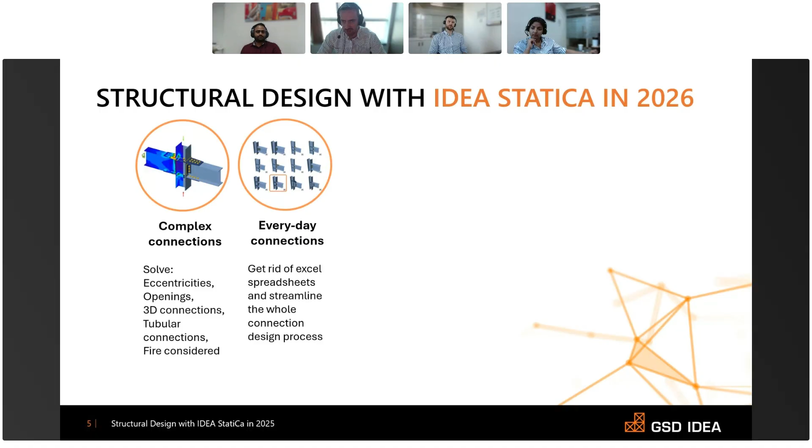Before we jump into the topic, just a quick reminder of how Idea Statica helps structural engineers, no matter whether you are a concrete steel contractor, EPC, precasting company, consultant. These use cases are the biggest pain of structural engineers for a long time, and these are the ones that Idea Statica supports and makes your life easy with. Complex connections, no need for further introduction. Everybody understands this is the flagship use case of Idea Statica. Everyday connections: compared to your most likely typical workflow with Excel spreadsheets, with simplified tools, you can save up to 80% of the time using Idea Statica on the standard connections.

Anchoring, another use case where engineers burn a lot of time. So whenever you need to check the base plate and consider the concrete block and reinforce it, this is where Idea Statica comes in and saves time. The 4th use case, concrete discontinuities, beams, walls with openings, pier caps, pile caps. These are a nightmare to design and code check properly, especially if you need to do not just the ULS checks, but also the SLS checks.

And the last use case is, coming back to steel, stability and buckling issues of a member, something that typically your global analysis tool will not provide. Okay, so that'd be the introduction. And now back to the topic of today. Dominic, please let us know why we're speaking.

All right, Jan, thank you. Let me just share my screen. All good? Can you see my screen? All right, awesome, thank you.

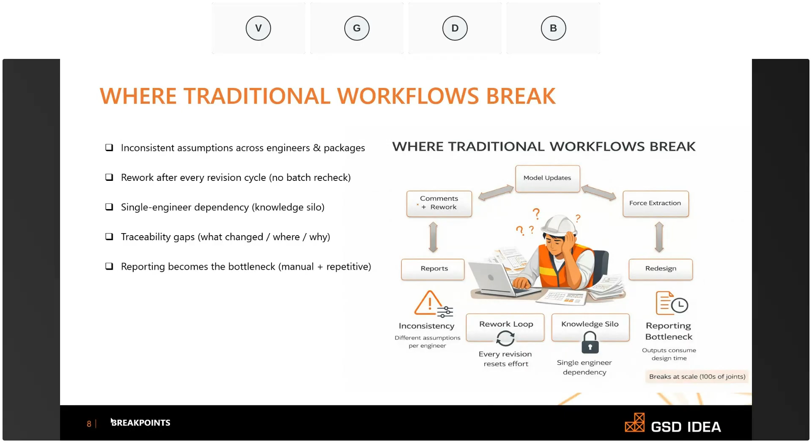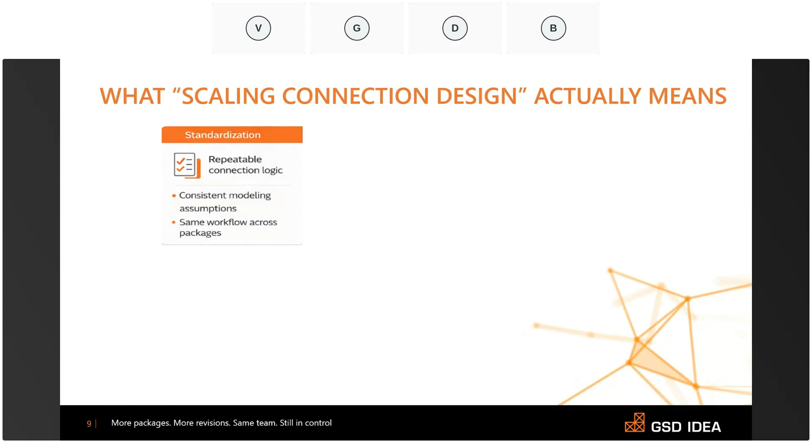Let's look at what scaling connection design actually means. When we want to scale the connection design effectively, we need to tackle the standardization: establish repeatable connection logic, consistent modeling assumptions, and uniform workflows across all packages. Similar connections should be designed in the same way, regardless of who works on them or where they appear.

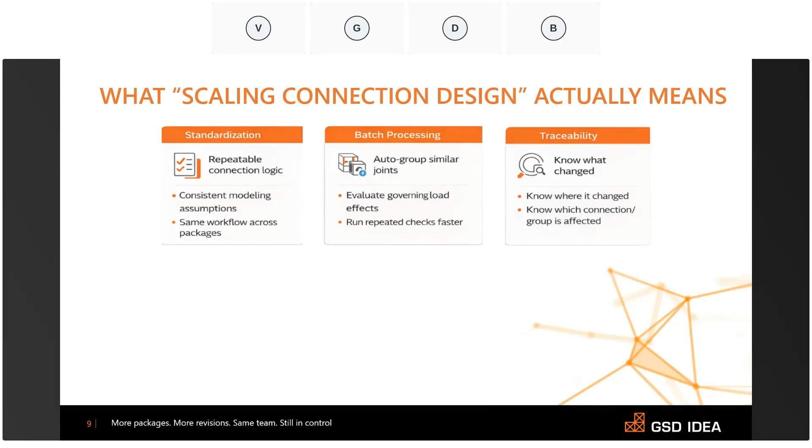Follow with the batch processing. Automatically group the joints, evaluate critical governing load effects, and run repeated checks in batches. Another point related to the problem is the traceability. Ensure the visibility into what changed, where it changed, and what is affected. Changes must be easy to identify, track, and audit throughout the whole design lifecycle.

Another point is the approval-ready outputs. Generating standardized approval-ready reports at scale should not be a problem. Since reporting is repeated for large groups of connections, this is a huge opportunity to automate and to reduce the manual efforts. Then the revision resilience. It enables seamless re-import of updated models, meaning we reuse the existing designs, continue from the current workflow state, and only recheck what has been changed rather than restarting the whole process again.

And last, engineering focus. We prioritize the unique or critical joints early in the process, and then avoid spending the time on low-risk repetitive connections, which are easier to tackle. We identify the critical joints early that require engineering judgment, and this increases the team throughput and significantly reduces the manual sorting and rework.

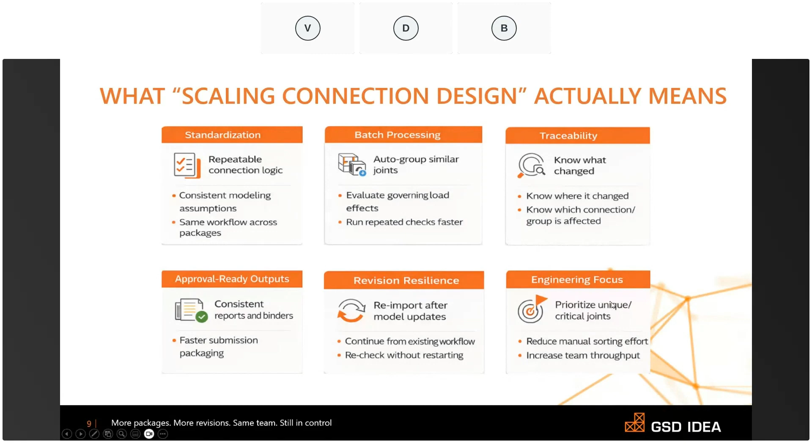Okay, now, before we get to that solution and we hear from Rose how to actually do that, I would like to know from our audience, where do you lose the most time in your current design check workflow? So I would like to launch the poll. And what are the options? We can vote for grouping and sorting similar joints across the model.

Or is it identifying the governing load combinations among many cases, or redesigning and checking after revisions, or preparing reports and submission binders for review that take a lot of time, or tracking and tracing the connections, IDs, and knowing which joint is where. Let us know in your voting. And if it's something completely different, please submit your comment to let us know what is your case. Okay, I'll give you a little more time to vote.

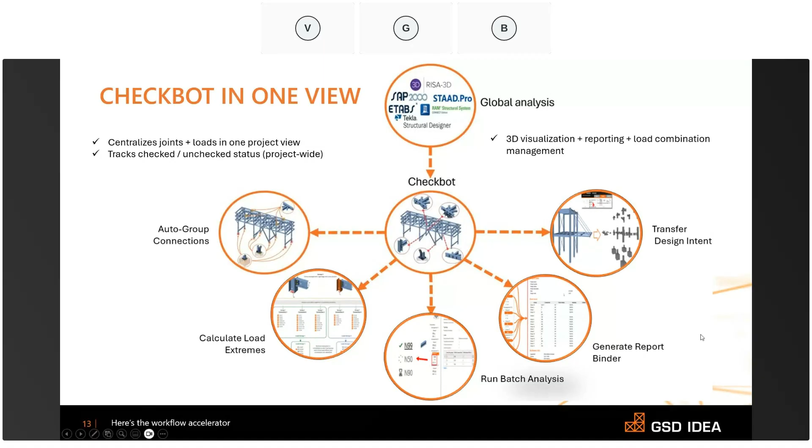And the best part of all of this, the reason why I called Checkbot the central hub in the first place, is that inside Checkbot you will get to know what is done, what is pending, and what has failed, all in one place. So there is no person who will have to keep tabs on the entire design workflow; instead, Checkbot does that for you. Now, let us elaborate the process and see a bit of Checkbot in detail,

starting from the global FEA. There are 45 plus CAD/FEA applications that can be linked with IDEA StatiCa at the moment. If you go to the IDEA StatiCa Support Center under BIM Workflow, supported integrations, you will find the list of CAD/FEA software that can be integrated with IDEA StatiCa, along with a demonstration of the integration process. So if your FEA software is within the list, just click on it and you can see the entire process by yourself.

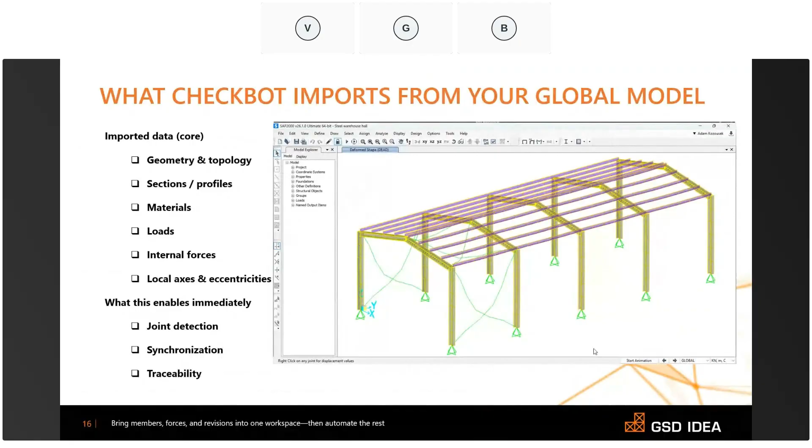Now, once the import from FEA to Checkbot is successful, let's see what exactly it imports and, most importantly, how that import helps the designer. It primarily imports the geometry and topology, which is the nodes and the members; the sections and profiles, which would be the steel cross sections; the materials, the grades, and the basic properties; load cases, combinations; internal forces: axial, shear, moment, and torsion; member directions; and also the rotations and offsets.

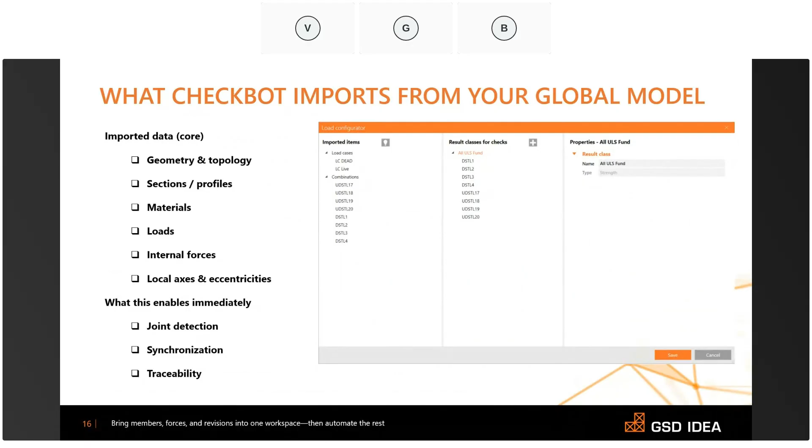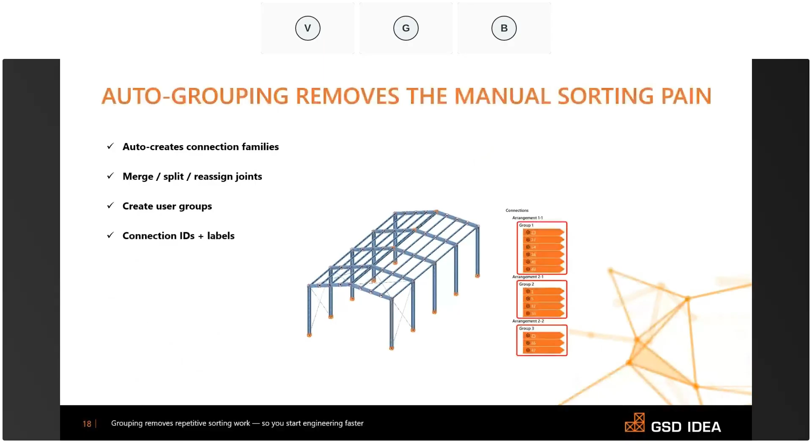And what does it do immediately? It auto identifies the connection locations in that model and groups them accordingly. So the primary task of Checkbot, as we've just discussed, is to auto group the connections across the whole model. We can generate these connection groups by four methods. The first is none, very self-explanatory: if you want connections to be grouped under no group, you can select none.

The second grouping is by typology. The third is advanced, with typology and cross section. And the fourth would be custom defined groups, commonly called user groups. Basically, it means that if you want to create a connection in a separate group and merge more connections to it, you can add those connections in a separate group.

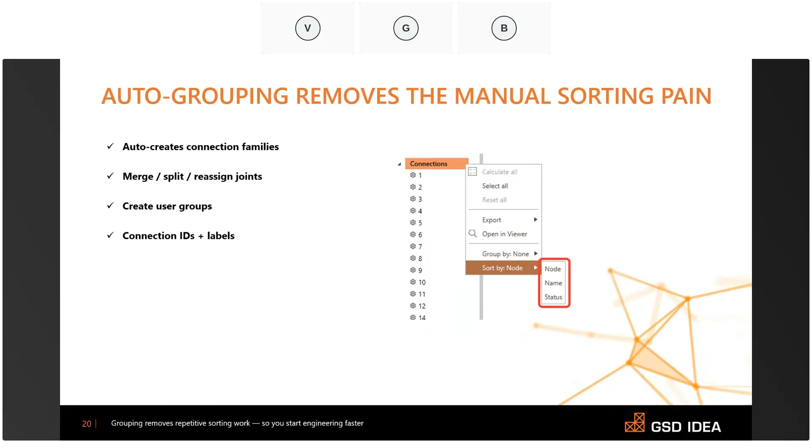And also you can sort the connections by name, node, and also the status of the analysis. Now let's see what exactly typology and arrangement mean. So I've told you about typology and the grouping part, but what exactly does typology mean? Typology means the number of members, that is member count, and also the relative orientation of the members, whether it's a beam to column member, if it's a beam to beam connection, etc.

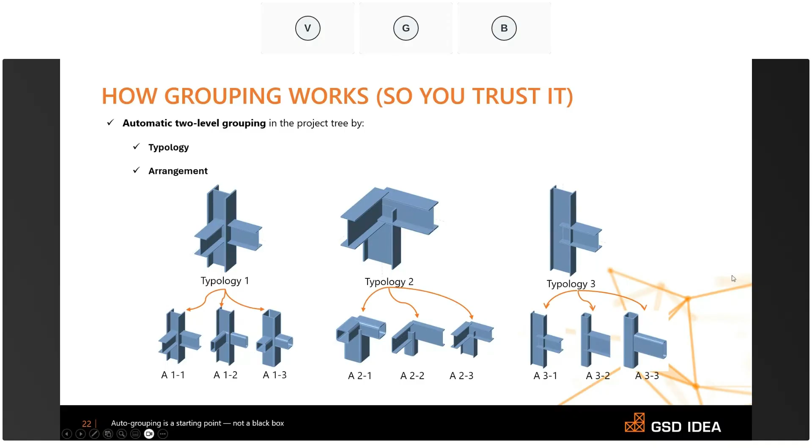And what is a subcategory of typology, which is the arrangement, that would be within a typology, which is grouped by cross sections and also the sizes of the cross section. So that's the base of the grouping in Idea Statica. Now the next task is the load combination. So let's just talk about the real load combinations.

All right. So in real projects, we don't have five load combinations. We have hundreds and we have thousands. So the problem is knowing which one actually governs that particular connection. And Checkbot automatically detects the governing maximum and minimum load effects for each of the connection groups. So it looks at all combinations and reduces them into the small set that actually controls that particular design.

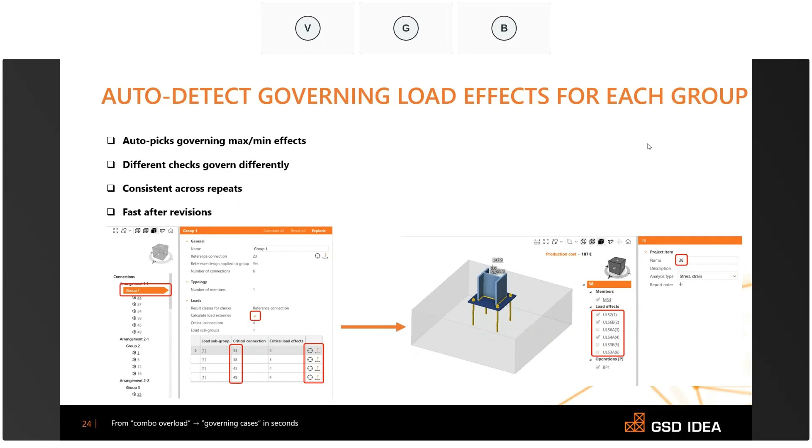Also, different checks are governed very differently. So axial force might govern one combination, shear and bending another. Interaction is a whole different story. So we would take a longer time to understand or create that loop, but Checkbot handles that logic automatically.

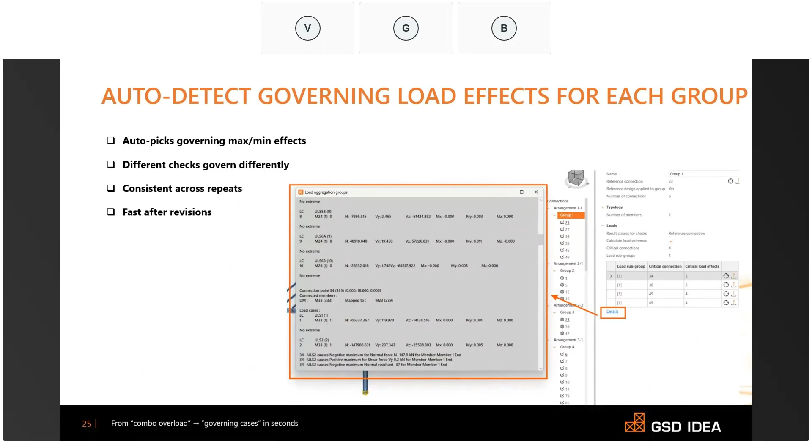Now the question is, what is the logic that runs behind the selection of governing load cases? As shown in the figure, it would be the maximum positive and maximum negative value of each of the internal forces, the axial, shear in Y, shear in Z, moment about X, Y, and Z, which altogether would give us 12 critical load cases. And then it checks for the combined resultants, which is maximum shear, maximum bending, and combined normal effects.

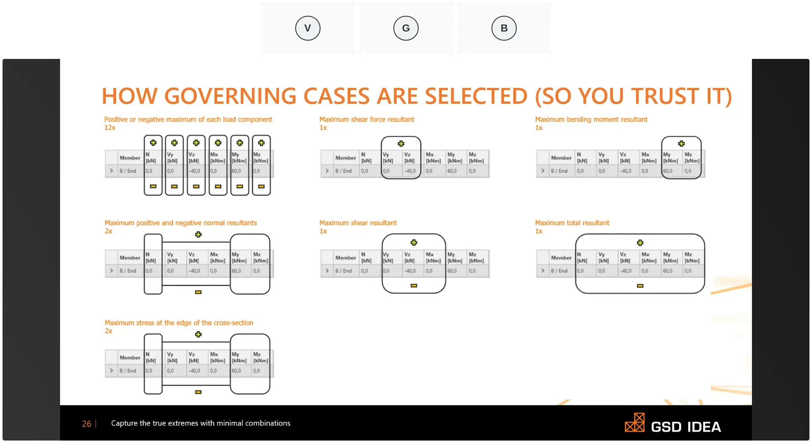It also evaluates cases where shear and torsion act together, because torsion can significantly change the shear behavior. And finally, it looks at the worst edge stress in the cross section as well, because in certain cases that's often what's governing. Now, this is the logic behind the selection of the load case. Now that we have seen the logic, let's discuss the calculate load extremes option in Idea Statica.

Now, many of you might have noticed this option, which is the calculation of load extremes. So what happens when we enable that in a connection group? Checkbot scans all load combinations for all connections in that group, and it automatically keeps only the extreme, the governing load effects, and unselects the rest.

So instead of checking hundreds of combinations per connection repeatedly, we reduce it to only one or a few of the critical ones. So that's why in most cases you might see a different number of critical load effects per connection. Sometimes it could be 2, it could be 1, it could be 3, etc. So in those cases, if you would want to change the typology or the operations based on the envelope, then you can change that as well.

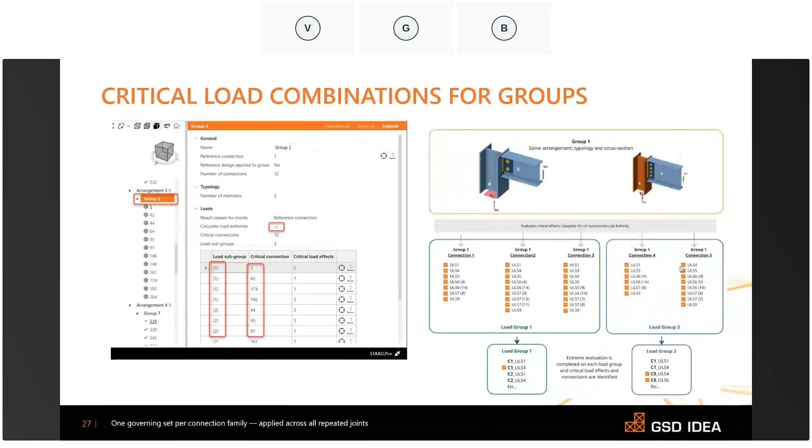Now, after loads, it would be the batch design or the batch analysis. A few terms that you would want to know before we proceed with the demo, which would be the reference connection. Now, what is a reference connection? It is the master connection for which we would be modeling the connection components in the IDEA StatiCa application. There are child connections. They are within the same family, but they are automatically linked to the reference connection.

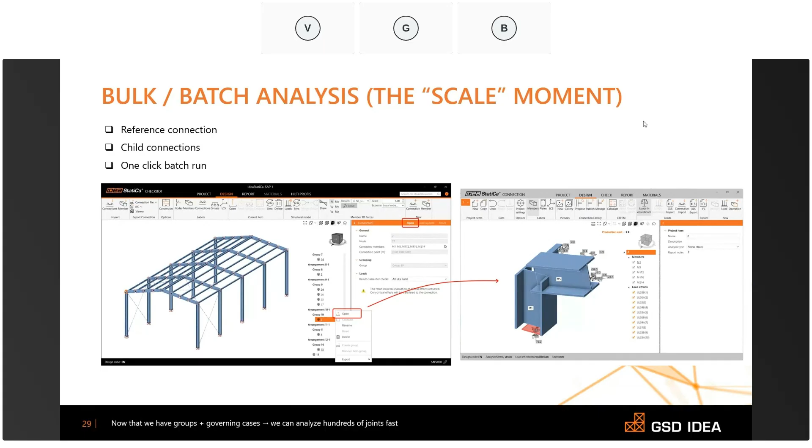Now, there is a one click batch run, which is the calculate all or calculate group tab, which means that Checkbot runs every child in that group, including the reference connection, in just one go. And also, we would be able to see the progress of the design, if it has passed or failed the code check, by seeing the color coding within Checkbot, and also by watching the symbols next to the respective connections, which would be a green check, a red cross, a cogwheel with a proceed mark, which Venki would be explaining in the demo session.

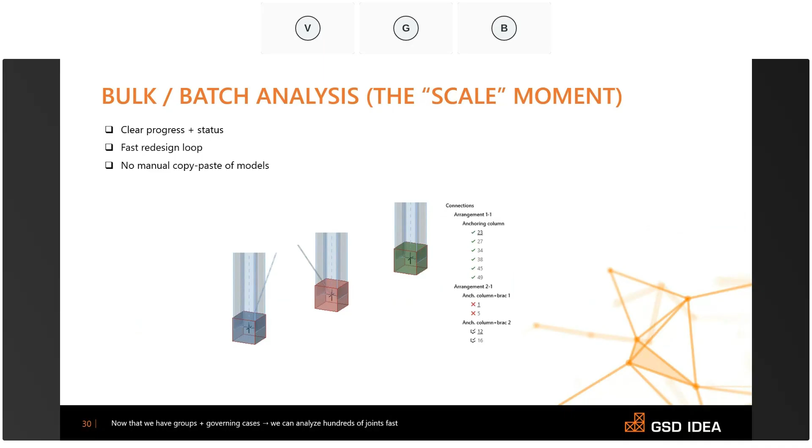And okay, now the question that you would have in your mind is, what gets copied from the reference to the child, and what stays unique in each individual connection? Obviously, the copy from the reference connection would be operations, the parameters, if you have defined any, the design codes, and also the settings, and the report templates.

But what stays unique per connection would be the internal forces or the load effects per connection, the member sizes, orientation, and also the member local axes, and the utilization for individual connections. That stays completely unique, irrespective of which are the reference and which the child connections.

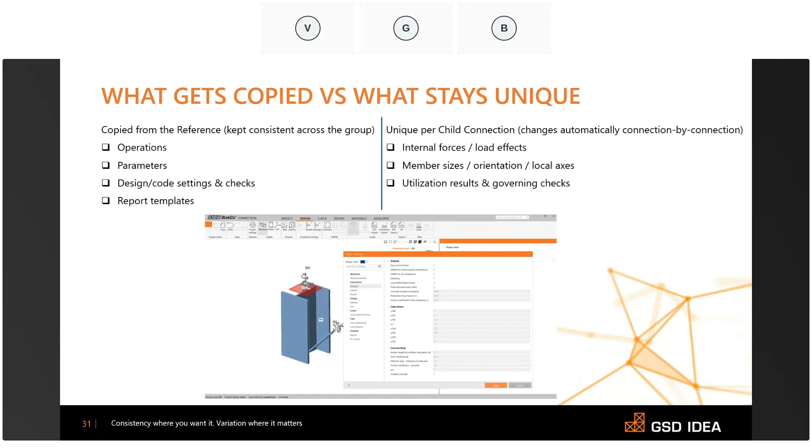Now, about the reports, the generation of reports in IDEA StatiCa — you can generate a bulk report or generate the complete binder after the first iteration, after revisions, or after consultant comments.

All you have to do if there is a revision is go back to the design, make the changes you want, run the bulk analysis again, and then come back to the report. Just click on the generate option, and it will automatically regenerate without changing the customization you kept for the project initially.

And the best part is that it can be exported not just as a complete binder — if you want to export it for individual connections, you can do that as well.

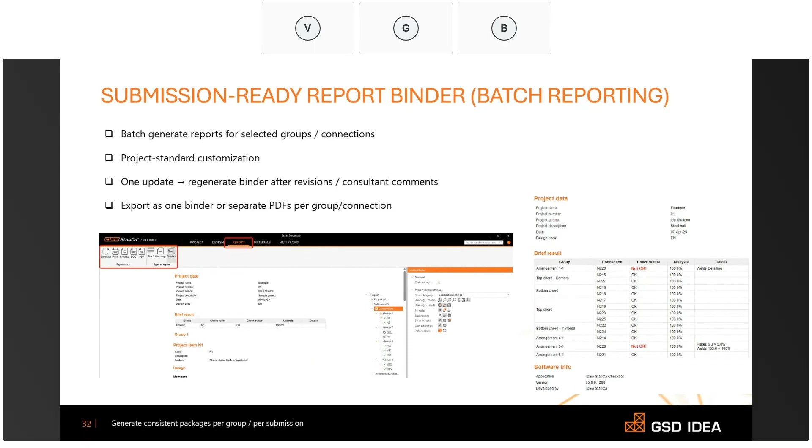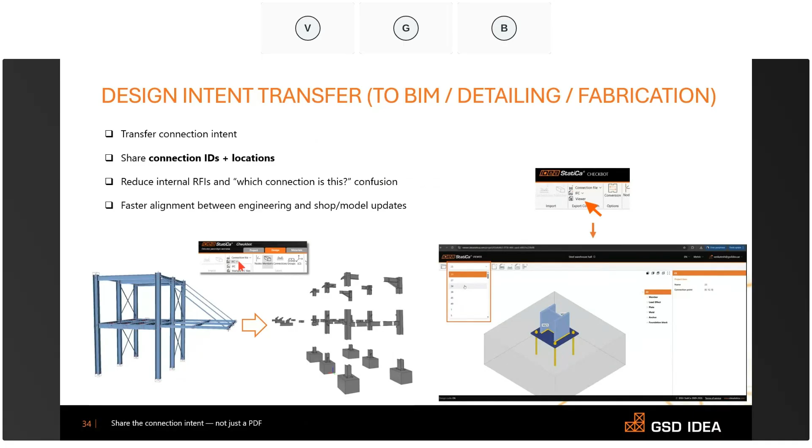As I mentioned in the beginning, not just the PDFs but also the design transfer, the entire intent transfer, can be done as a whole without losing anything, through two methods — IFC, and also the IDEA StatiCa Viewer.

And with that, I am passing the presenter on to Venki. So Venki, just walk us through the demonstration of the Checkbot.

Yes, thank you, Rose, for walking us through the technical aspects of the batch workflow which users get benefited from. Let me quickly share my screen to walk you through the practical application side. I hope everyone can see my screen. Okay, great, thanks for confirmation.

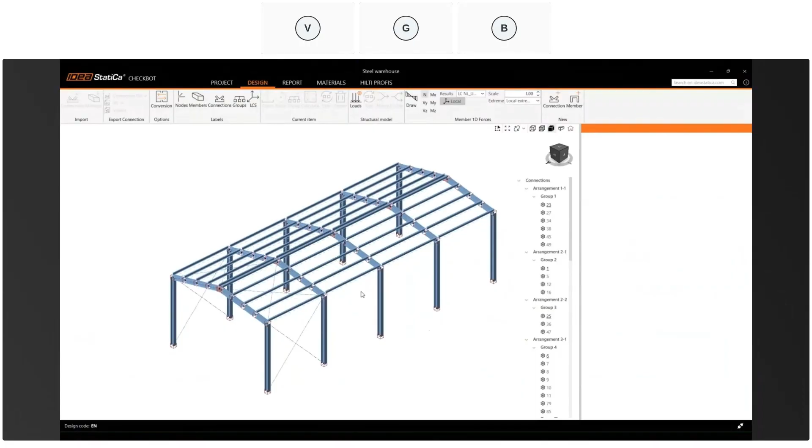So let's walk through the demonstration. In the Checkbot, once you have the model integrated and imported, this is how it looks — the entire structure, which has all the information about section sizes, material grades, and so on.

To quickly see that, you can go to the material tab, and here you can see all the cross sections and material grades which were imported from the global analysis model.

All the load cases and load combinations from the global analysis model will be imported as well, found in the loads tab. On the left side you can see all the load cases and load combinations, and on the right side the result class for which your respective connections are being analyzed.

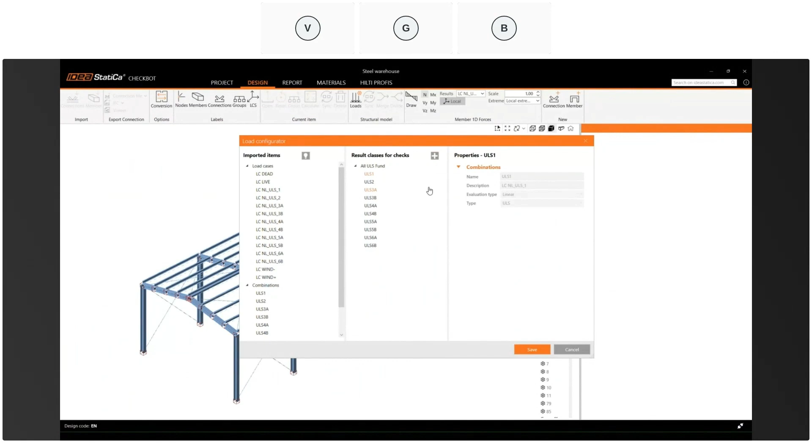It's very easy to customize this — you can just right click and delete it, or drag and drop the load cases for consideration, or create your own result class if you want to analyze certain sets of connections with a particular result class.

You also have the conversion tab, where some material names in your global model might not exactly match IDEA StatiCa database names. That list will be here.

You can just click on this plus to assign the IDEA StatiCa native database profiles to these unmapped section sizes if they were not mapped properly.

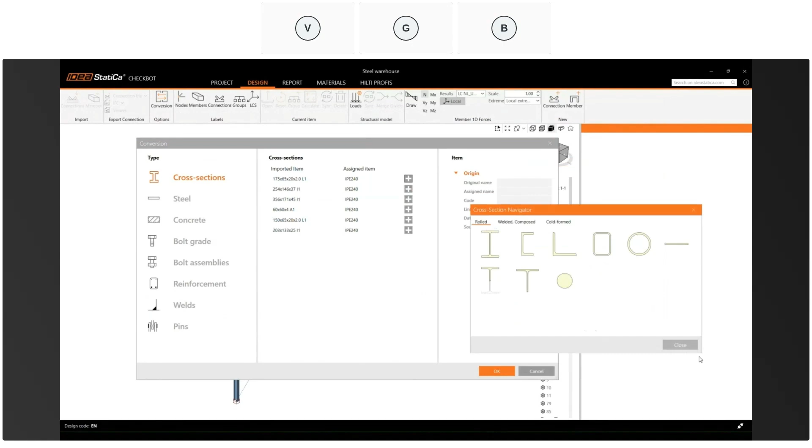This can be done at any point in the process, so if something is done accidentally, you don't have to worry about it.

This is what we call the dynamic transforming cube. As of now it's transparent, but it's called dynamic because it changes colors based on the status of the connection, which Rose explained. This cube is unique to each location, which has a unique name.

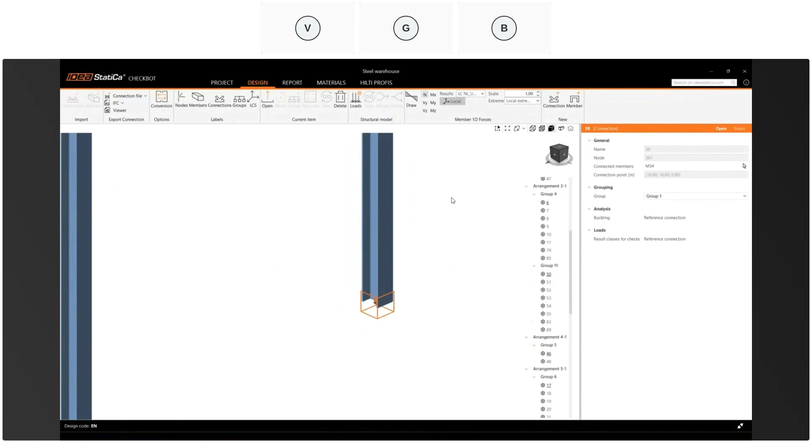This connection name is 38, which can be seen on the right side. Also, we can see the rafter is split — this is very common in the global analysis model, but we do not want this for the connection design.

So what do we do? There is an option in Checkbot to merge the member — just click on the member, and in the top structural model options there is a merge option. Click on it, and it will give you a list of members which can be merged. Switch it on and click merge.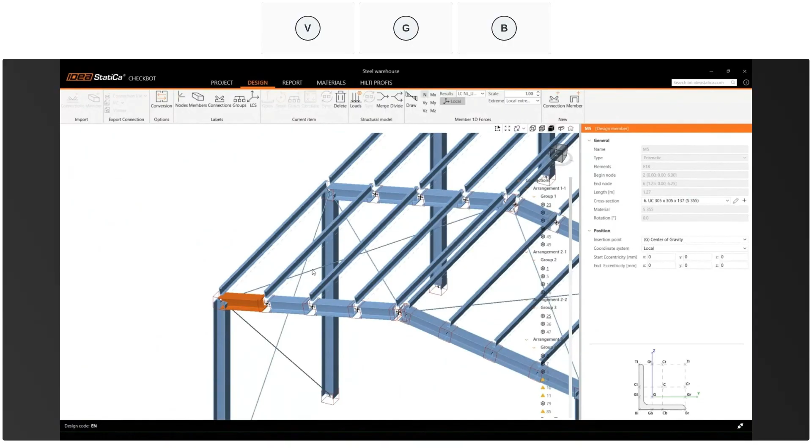Press OK, and similarly you can repeat the process for the left side rafter — just click on one member and merge. It will give you a list of members that can be merged in the same plane, so merge it.

One shortcut here: if you click merge and have automatic ticked at the bottom, click on the top to auto-select everything and click merge. Similarly, if you have the selected member at the top, select the bottom member to auto-select all the rest of the members in the selection — that's a shortcut if you have more members.

And similarly, you can repeat the process for the rest of the rafters — third rafter merge, fourth rafter, and the last rafter.

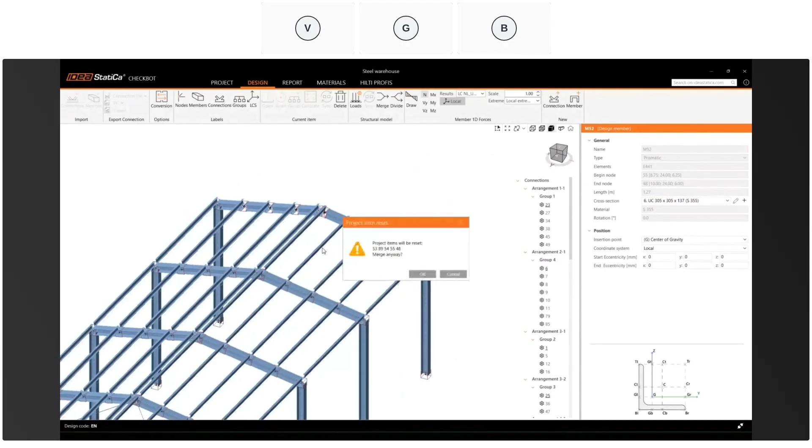So the merging process is done. You can see group one, which corresponds to a single group of similar connections, and the highlighted locations on the canvas are shown as yellow color cubes.

At any point, if you don't like the name assigned by Checkbot, you can change it to your preference. Here, I'll change it to base plate connection. And it will be changed - the group name changes from default to base plate.

This group has one connection with an underline, and the rest without underline, which means the underlined connection is the master or reference connection, and the rest are child or dependent connections. So we will work with only the master connection. Let's see how it goes.

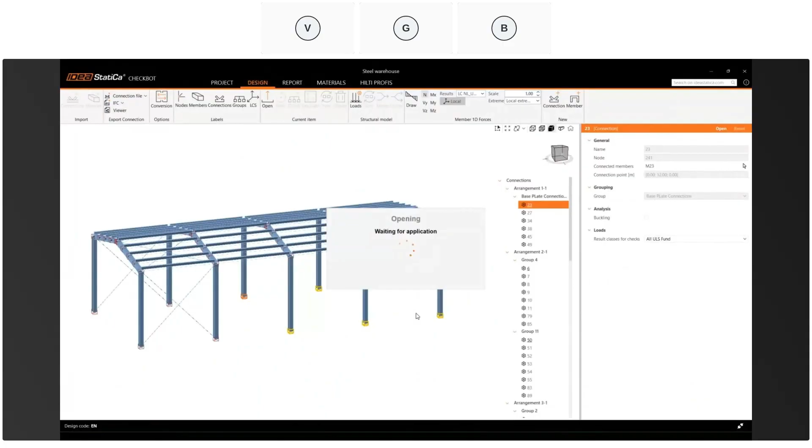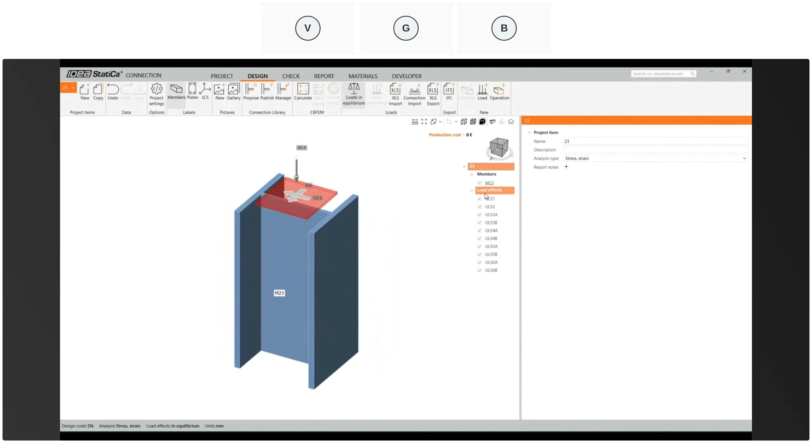So we are opening the 23rd connection, and the analysis will be performed in the connection module itself, since Checkbot doesn't have a native analysis engine. Here, the member topology is shown, and all load cases were automatically imported from the global analysis model. All we have to do is assign the design operations, like the base plate in this case.

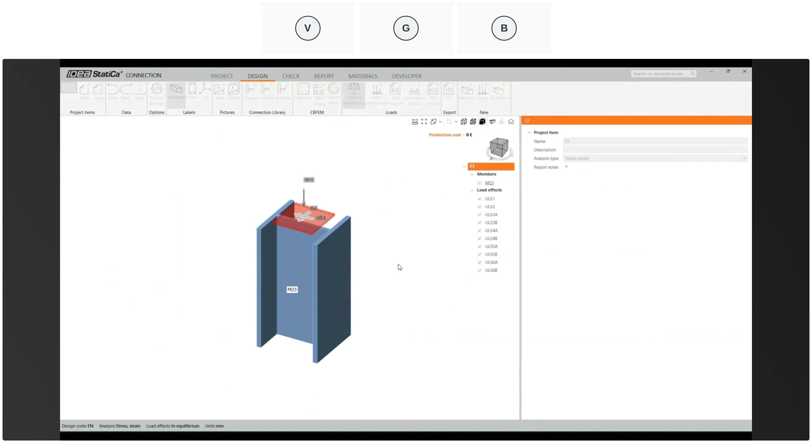For that, we can go to operations and click on the base plate operation. But since we're highlighting the workflow, let's take a shortcut possible in IDEA StatiCa - go to the propose option. Once you click propose, similar topology templates that can be applied will pop up. Just select as per your requirement and press OK to automatically assign the template to the topology.

I have my connection already done, so if I want any changes, I can quickly change by referring to the properties. I'll quickly save it and close it.

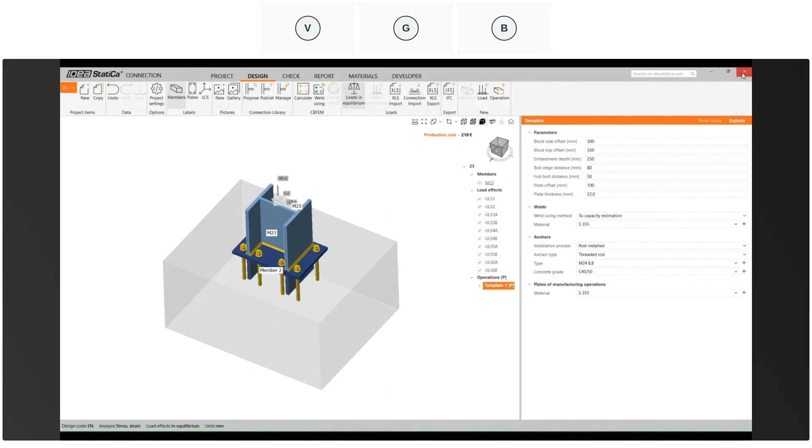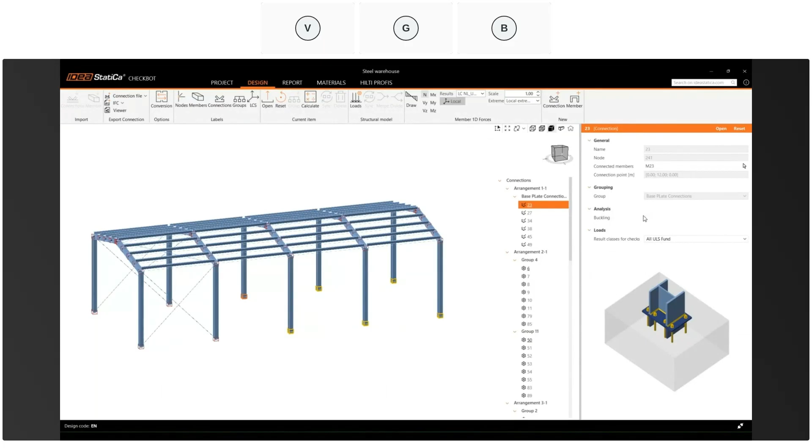So we've finished the master connection or reference connection. If you want buckling analysis as well, click the master connection, and there's an option on the right side to switch on buckling. You only need to set it on the master connection, and that setting will be automatically copied to the rest of the connections.

If you click the group, you'll see an option called calculate load extremes, which Rose explained earlier in her presentation. Once switched on, load extremes are calculated for similar connections in the group. Here the group has 6 connections, but only 4 are critical - meaning 2 similar connections don't have critical load combinations and don't need analysis. Let's switch on calculate load extremes and see how it works.

So the 23 connection is not critical as per critical load effects. Let's open the connection in the connection module to see it.

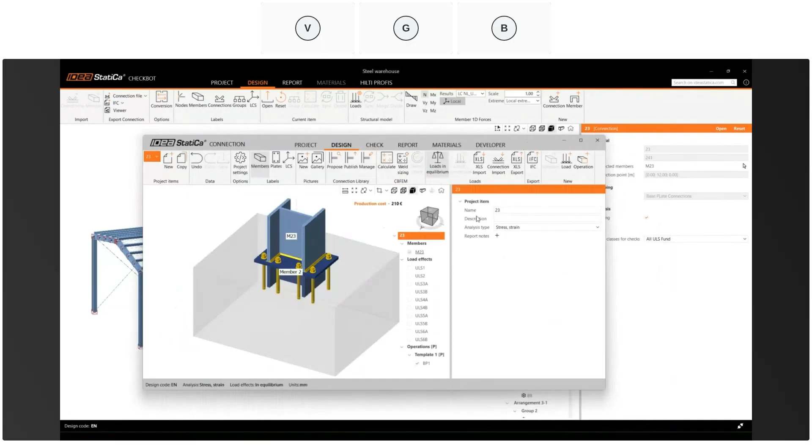Here it is - all the load effects on the right side are switched off, meaning no load combination is critical. You can see a dash next to 23, meaning it's not critical and needs no analysis, as decided by critical load effects. Let's open another connection, the 34 connection, and see what happens there.

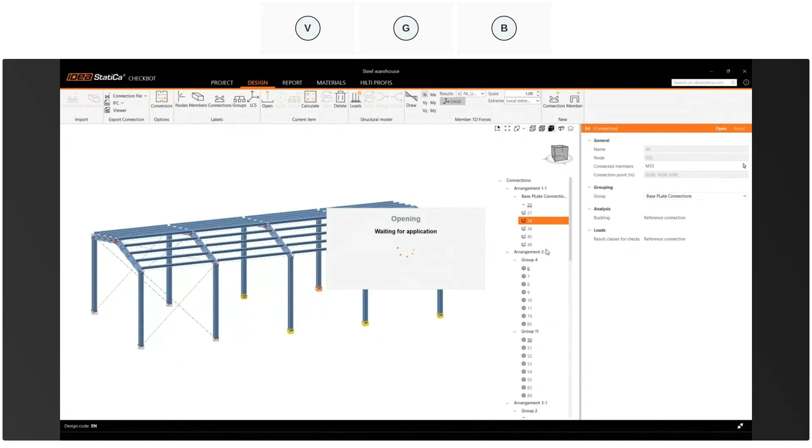Here you can see the load effects - all are switched off except certain cases which are switched on in disabled mode, meaning only the critical load effects are chosen. This is done automatically by Checkbot itself. This is what critical load effects does - if you have a huge number of load combinations, it reduces them to a manageable, minimal set for faster analysis, saving a lot of time.

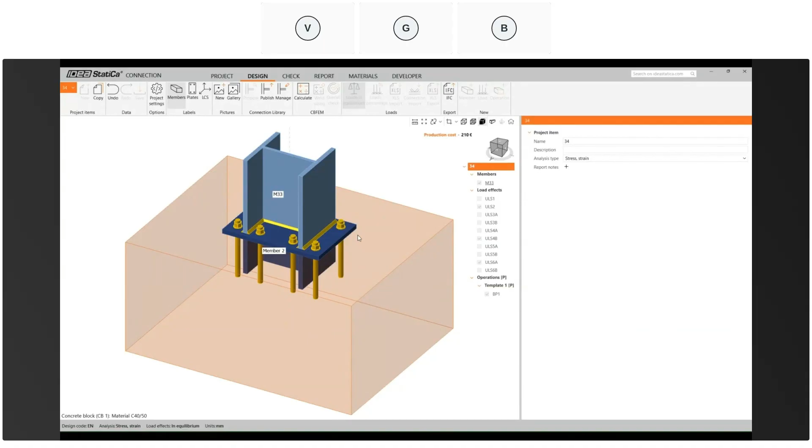On the left side, we can see the design operations are automatically copied or propagated from the master connection into this child connection. Let's close it and right-click on the connection to calculate all - with one click we can calculate all similar connections in that group.

We can see dashes next to 23 and 27, meaning those 2 connections are not critical. On the right side, calculate load extremes shows only 4 connections are critical, so only those 4 critical connections are being analyzed.

Once you click the analyzed connection, you can see the summary of results - plates, anchors, welds, including buckling. So while the analysis is performed, you can check the results without opening the connection module again.

And similarly for the next group, we will open the master connection and just click on 6 and open the master connection. So here we can see it says saving connection. In CheckBot, there is no automatic save button, but the saving is done automatically, so you don't have to do anything. This process is automatic.

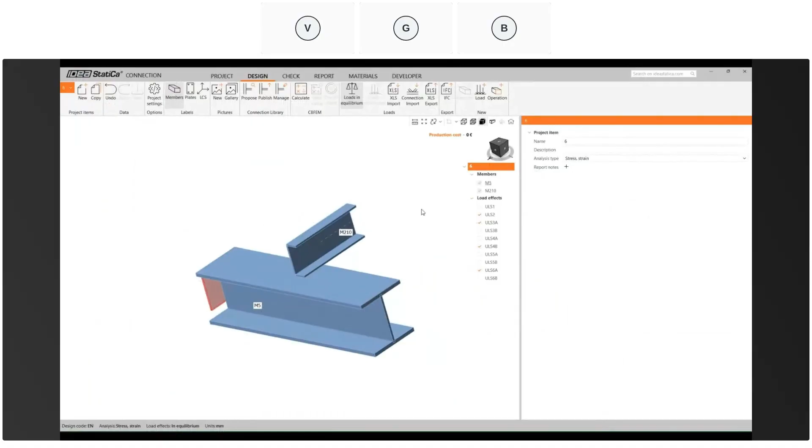Now, after saving, the 6th connection is getting opened. Similarly, what we did in the first group, we will repeat the same process again. We'll assign design operations, switch on calculate load extremes and buckling, and calculate all. And we'll repeat this process for a few other groups.

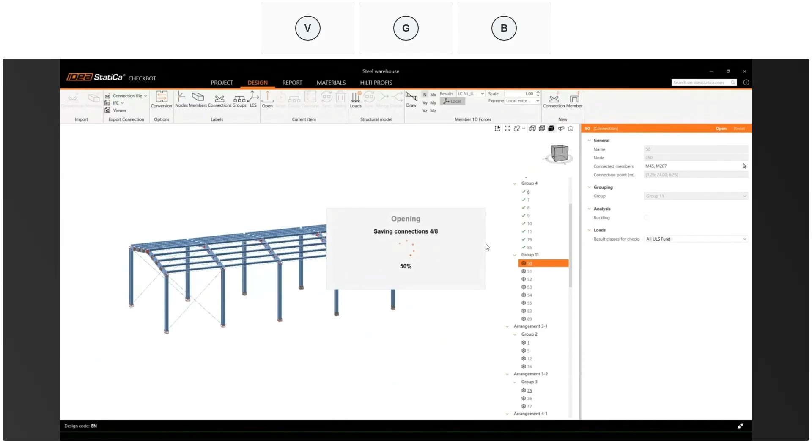Like group 11, we'll open the master connection. It saves the CheckBot file, and it opens the 50 connection in the connection module, and we will bulk calculate.

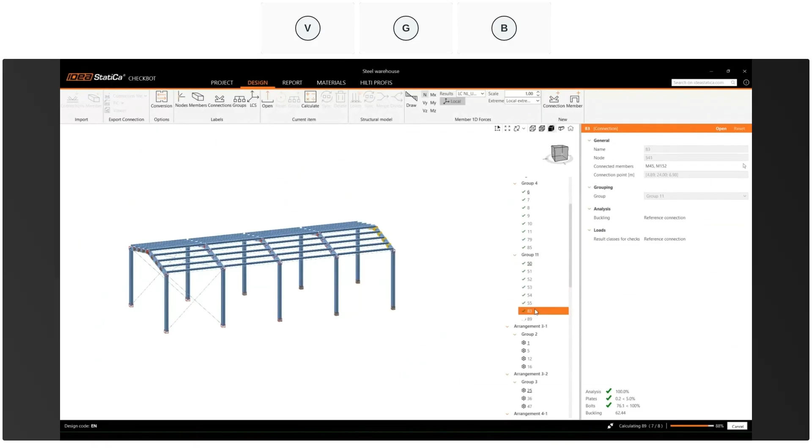So what we are doing is we are analyzing each and every joint in the structure for their respective load combinations, which will end up having an economical design rather than being over conservative with thicker plates or more bolts, and so on.

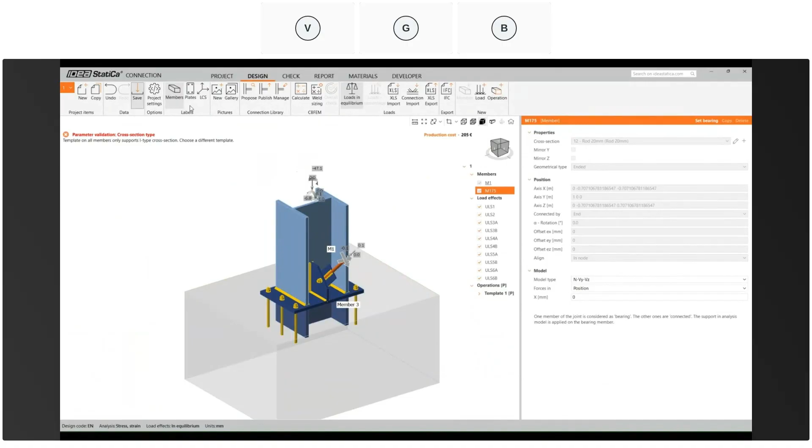So we do have a lot of shortcuts to use in IDEA StatiCa. If you're not using them, feel free to explore them.

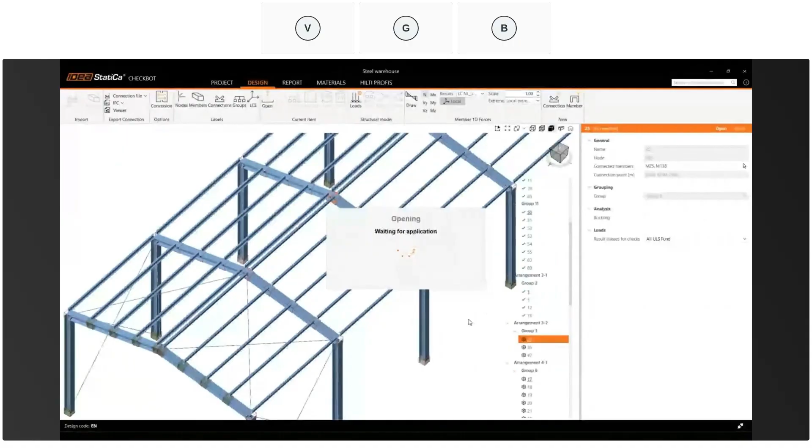So group 2 is done. Then we'll go with group 3. We'll open the master connection, which is connection 23, and we'll assign some template, save it, close it, and analyze it.

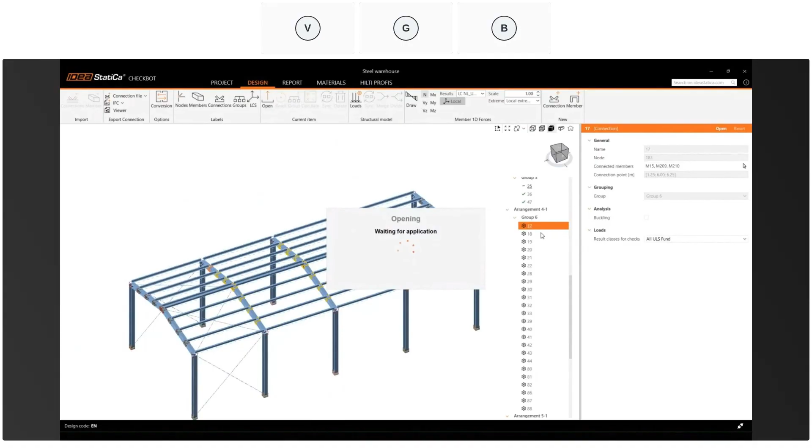And group 6 is the last group we will be analyzing for this demonstration. Here also we will open the master connection and assign a template, and we'll bulk analyze. As you can see, there are 16 critical connections in this group 6.

This is a common structure in any moderate to big scale structures. Like Jan mentioned at the start, data centers will have a lot of repeatable connections, and these warehouses or decking slabs or mezzanine floors, and so on, will have a huge number of repeatable connections. So we will design one and bulk analyze the rest of the similar connections in this fashion.

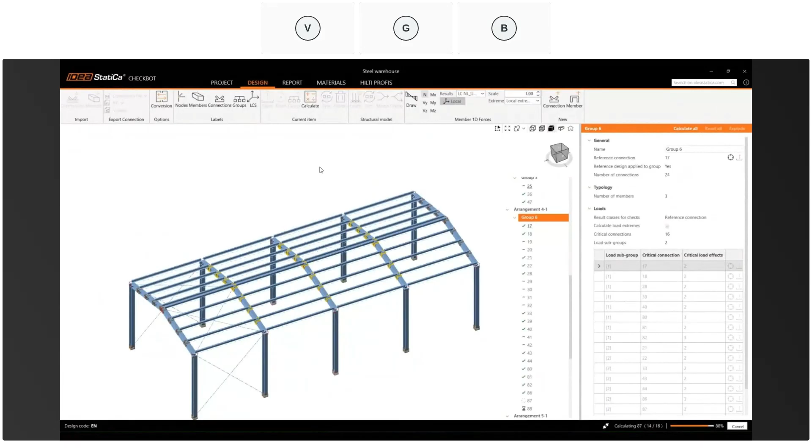So this 6th group is almost done. So it is done—you can see the dynamic cube transformed into green, which says code check passed.

So after we have successfully analyzed, the next step is for us to prepare the report. Let's go to the report tab. The report tab here is not an individual report—it's a submission ready binder, what you'll get out of it. IDEA StatiCa reports are flexible, as you know, so you can select any options you want to see, like the project info, software information, and the connection settings, and you can switch on or off any report you want to see in the binder. Certain reports as well you can switch on or off.

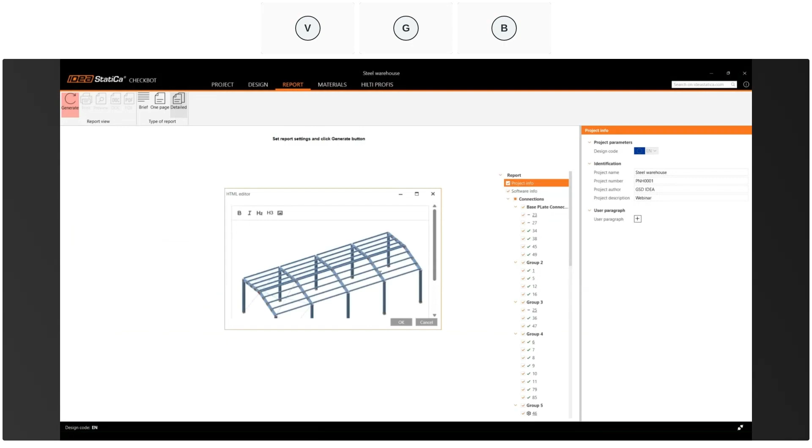There is also a user paragraph for the project, in which you can add certain text or any visuals. So here I'm adding a visual for the entire structure. As you can see, this image I can see in the final report, as well as individual groups. You have this option to add any custom defined paragraphs or images—you can just type anything, or add an image. The purpose of adding an image to a group might be to represent the marking plan for that respective connection.

And similarly, we'll repeat the same process for the rest of the groups, like group 2, group 3, marking plan for the next group, and for group 6, and finally group 11.

So once it is done, we will click on generate. In the report, we have 3 sets of options: the first is brief, the second is a 1 page, and the last is a detailed option. What we are generating is the detailed option, which has the summary and the individual reports extracted from IDEA StatiCa attached.

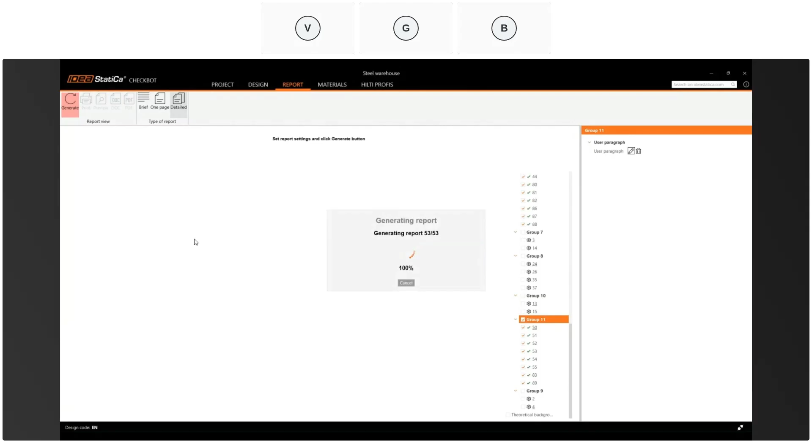So here is the report. First is the project information—you can customize it as per your requirement. Next is the structure representation for which this particular package is being submitted.

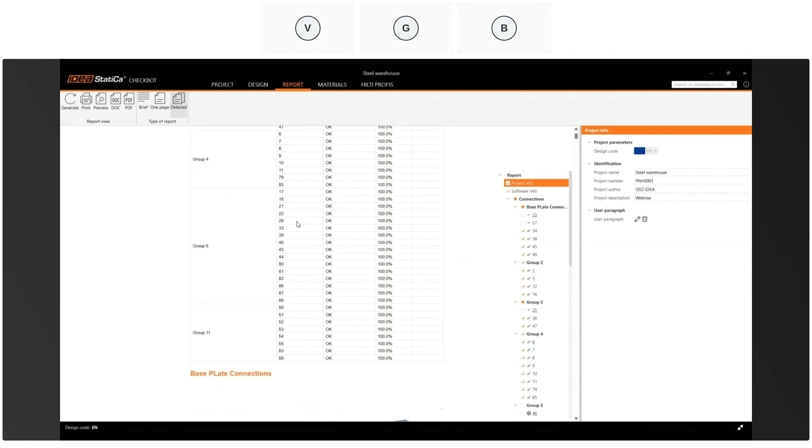Followed by the software information, followed by the summary of all the connections we selected, of all the groups, followed by connection IDs, status, and percentage. If you select the brief option, you will have it up to the summary. But since we selected detail, we have a continuation with the base plate group, which has the marking plan, followed by the individual reports, like project item 34.

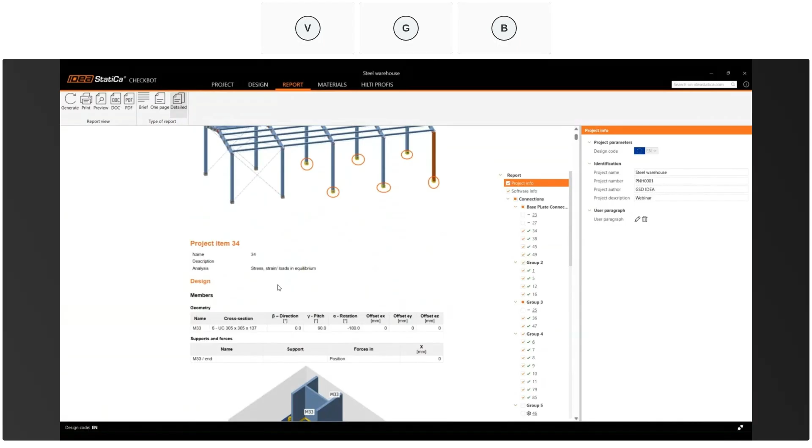This is similar to what we extract as an individual report. It has all the information about the inputs and the stress checks, strain checks, and even buckling analysis results, followed by the second connection, and so on. And on the right side, you can use these connections as bookmarks as well. Just click on it to go to that location.

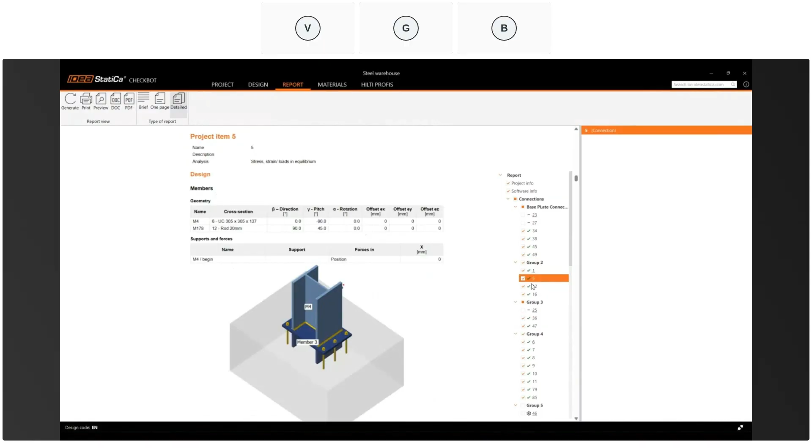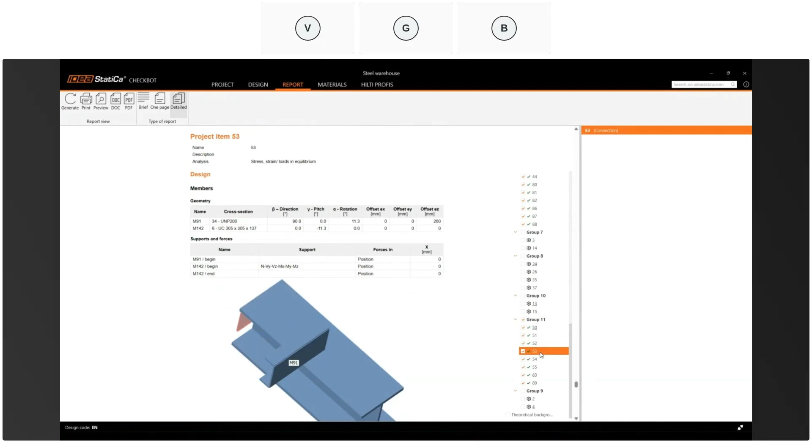And finally, you can export the combined binder, and this report can be exported in two formats. One is a document and the other one is a PDF file. So you don't have to do anything. You just print it and submit it.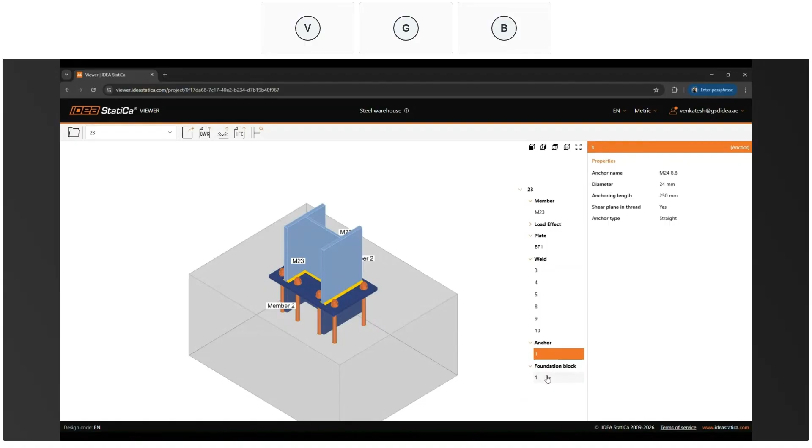So here you can see the viewer link, which has the information about section sizes, load effects, the plate bill of material information, very detailed information, and the weld sizes, the type of welds, anchor diameters, and even the concrete block information. And this viewer link has not only a single file, but all the files we selected in Checkbot. And you can select any connection to see it, and see the detail level of information available in the viewer.

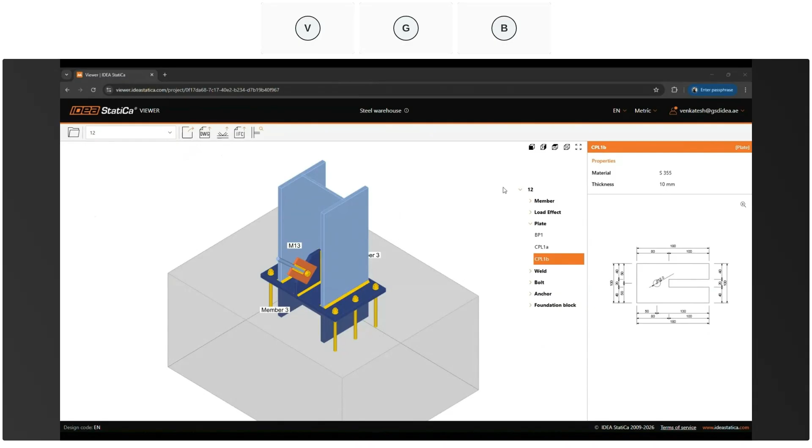And this viewer link can be downloaded as a 3D DWG file. You can export as an IDEA StatiCa file or even as an IFC file. Easy to share. And the second method is we select the connections we want to export, go to the export connections, and click on IFC. There are two options, multiple IFC files or combined IFC. So we'll go with combined IFC for this and save it with some name. Here we'll go with warehouse IFC.

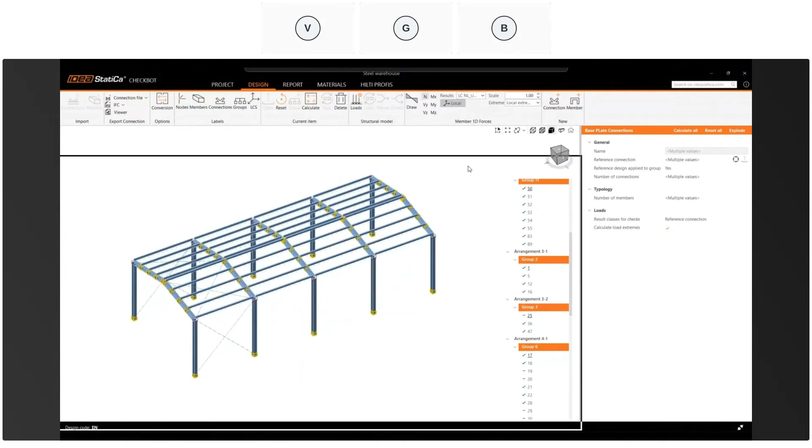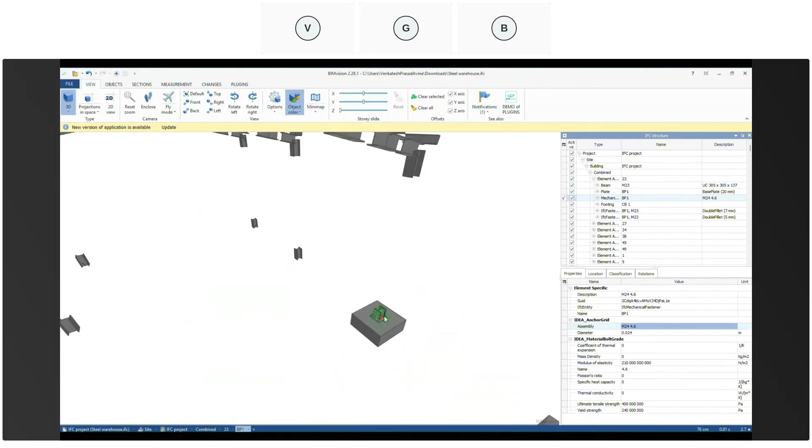And one IFC file will be opened. So here it is. As you know, IFC files are the most compatible format across BIM models, FEM models, or CAD models. This IFC model has a lot of data as well. Once you click on it, you can see the information about each object, about the anchors, M24, and so on. And most of all, the major benefit of using IFC files is that it retains the coordinates, so you can superimpose it with any third-party applications to check for clashes with other departments.

So that is the end of the demonstration. Let me continue with some tips you can use while working with Checkbot. The first one is the force check. When you import your global analysis model into Checkbot, you might be curious to check whether the forces are transferring exactly as per the global analysis model or not.

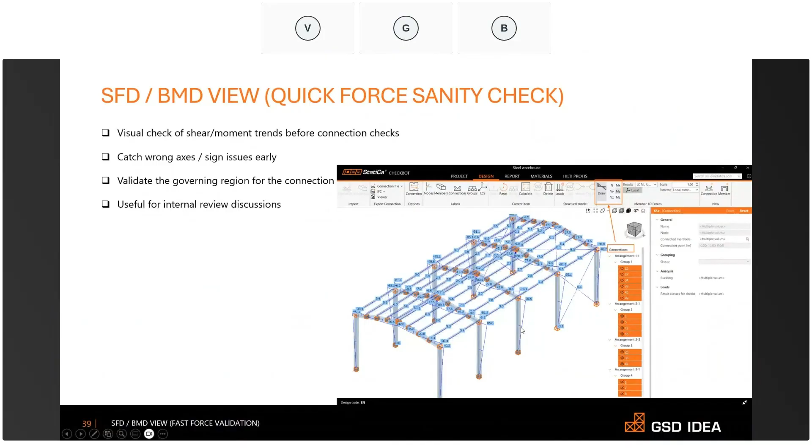Then you can open the model in Checkbot, go to the draw option, and select any degree of freedom, translational or rotational, to see that respective view while selecting the connection IDs in the tree of items. In this case, I selected the connections and the major axis bending moment diagram, and I can see the view accordingly. This serves to quickly verify whether the forces are being transferred properly or not. So use this option to cross-check the forces.

And the second one, the area selection tool. Sometimes the global analysis model will not properly match in Checkbot. We might have to assign some eccentricities as per the connection intent. Checkbot has unique options for that. You can click on the member to assign the eccentricities of this member at the start node and end node, and this member will be offset accordingly based on the eccentricities provided.

And if it is a big structure, there might be a lot of members. In such a case, there is another option called the area tool. You can select the area tool, select all the members in the area by dragging a box, and assign the eccentricities for all the selected members in one go.

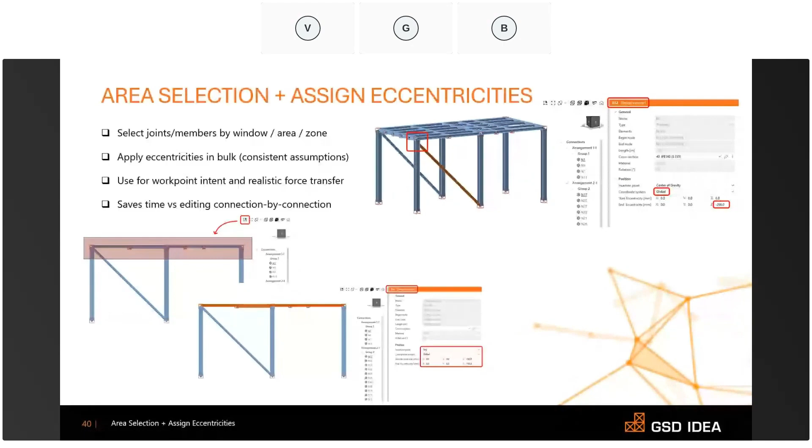And also all the selected members can be adjusted with respect to the insertion point, like top of steel or bottom of steel or CG to CG, and so on. To have more context on this insertion point, you can see them here. If you put top, all objects will be aligned with the top, and if you put bottom, all objects will be aligned with the bottom. And you can select any of these options in the insertion point.

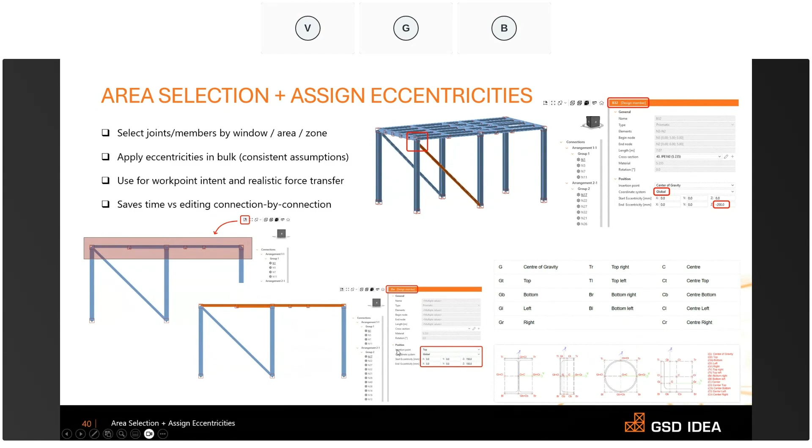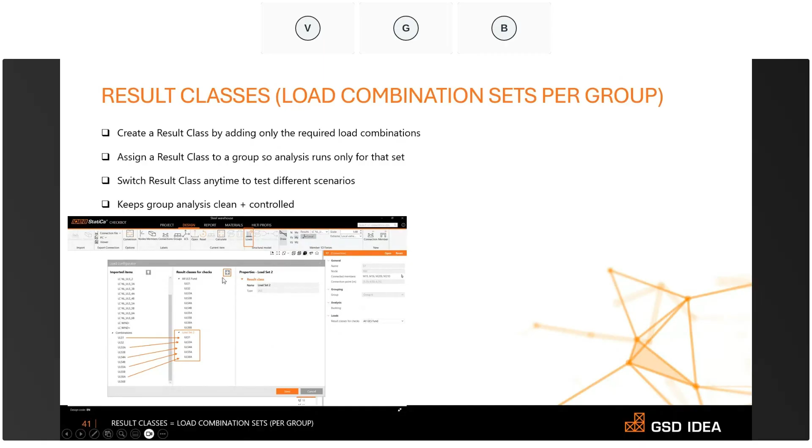And you can click the master connection in the group and assign the newly created result class, so that this group will be checked for the new result class of load combinations which you have created. So this is very flexible.

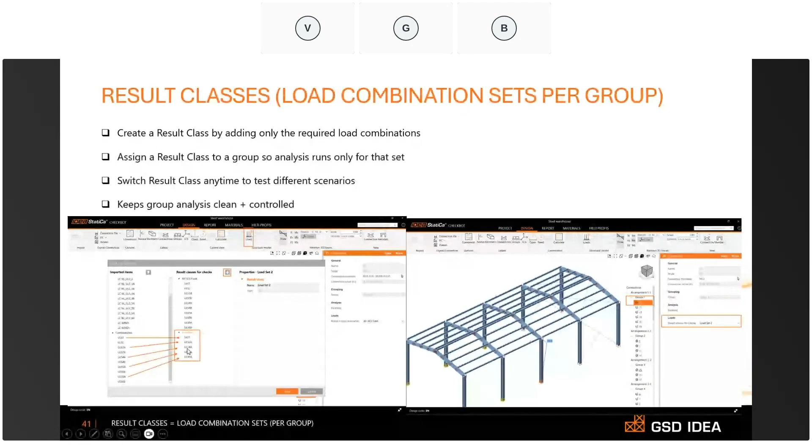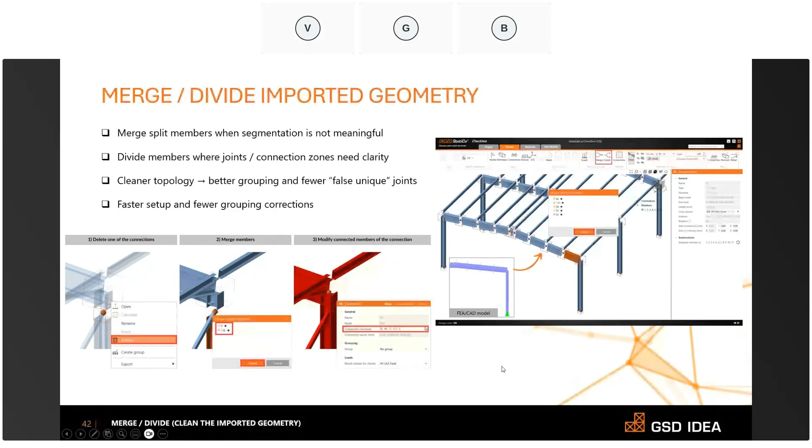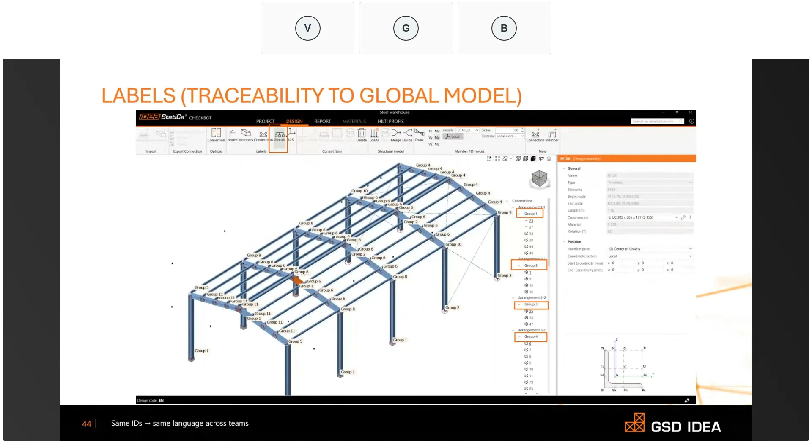Okay, so it's on. Please go to the poll tab and vote in the second poll. How do you perceive what you've heard and seen today would improve your workflow? Either it would be a major change, a great change, somewhere in the middle, you would use it once in a while depending on the project, you're not sure and need to test it, or you work completely differently or don't believe it would help you. The same applies if you already use IDEA StatiCa and have partially or fully implemented this process. Let us know how much it changed your workflow.

All right, the votes are coming. Still a lot of people didn't vote, but we can wrap it up in a few seconds. So far, very useful, clear productivity gain, which is a great sign of how significant this topic is.